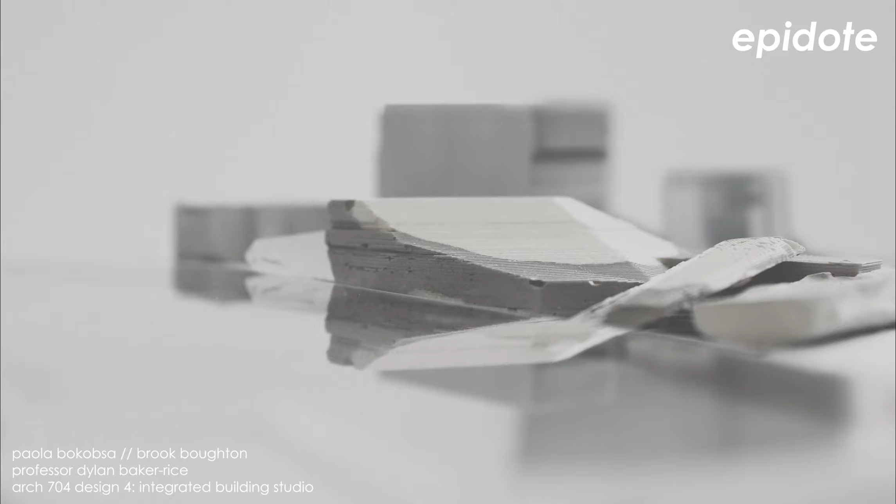Our site sits at the intersection of the shifting and re-energized Brooklyn Navy Yards and the socially complex Williamsburg. We studied the evolution of the Brooklyn Navy Yards dating back to the early 1800s and focused these studies on the ideas of change in time through the lens of the shifting shoreline and piers.

We found our site in a state of disuse and neglect, yet a sense of calm, nature, and serenity was deeply imbued. Wildlife is abundant, the channel invites people to explore the water's edge, and the sounds of the city are distant.

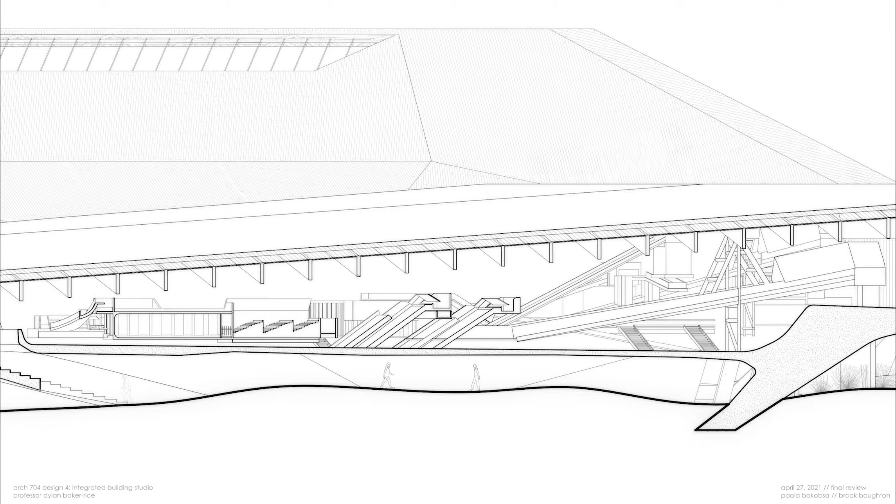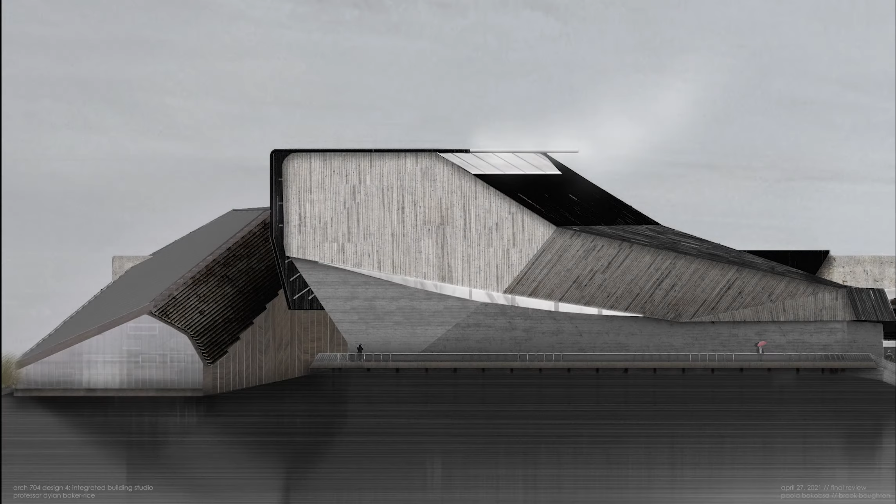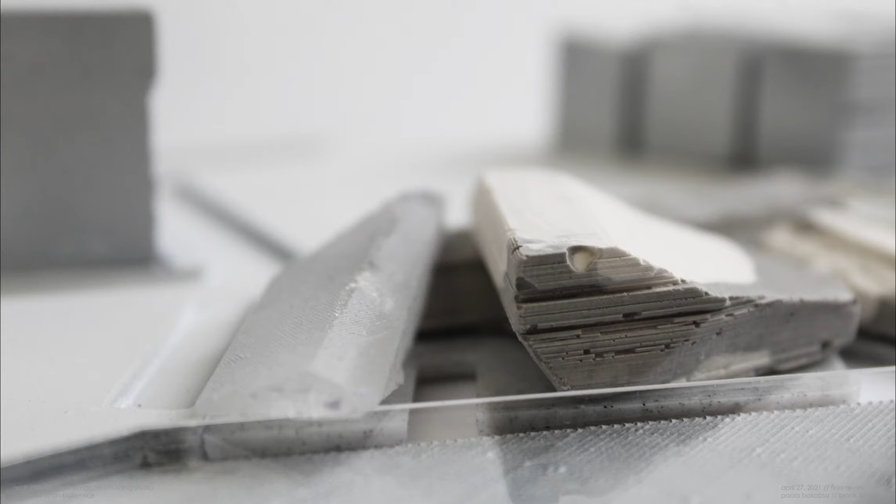The site gave an opportunity to create an industrialized nature by breaking down the dichotomy of human-built and natural habitat. The reinterpretation of sea caves as natural environments to architecturalize spaces created various moments of speculation. We asked ourselves the following question: how can natural spaces be reshaped through architectural means?

Our project aims to create a retreat from the city, while being conscious of the constraints of time and the constant change of the environment. It is a space for reflection and introspection.

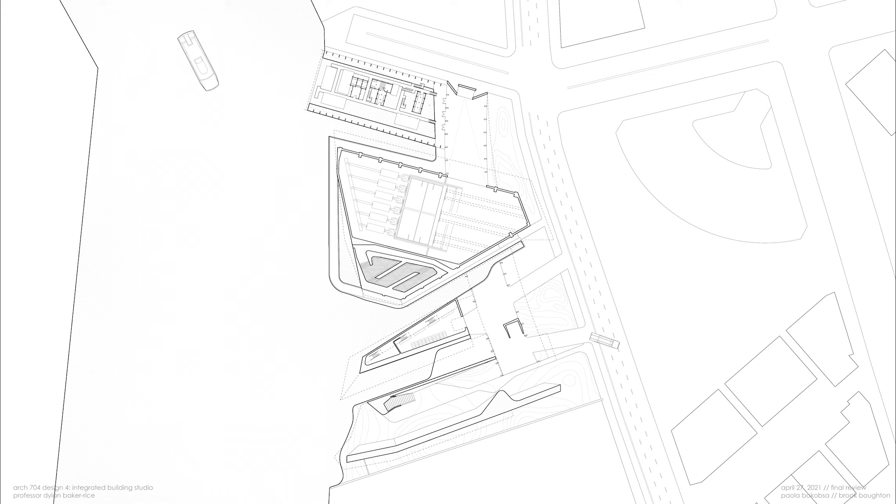We fractured the idea of the program itself, destruction and regeneration, and we applied it to the design of the site, the buildings, and the circulation.

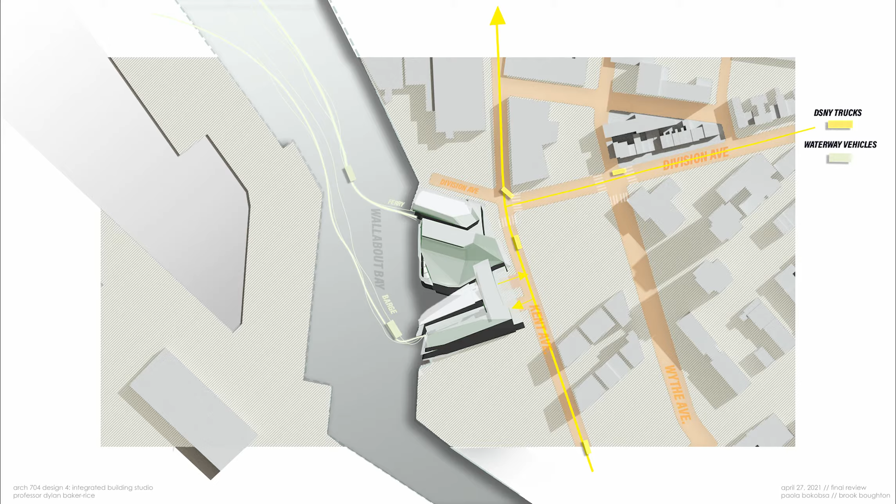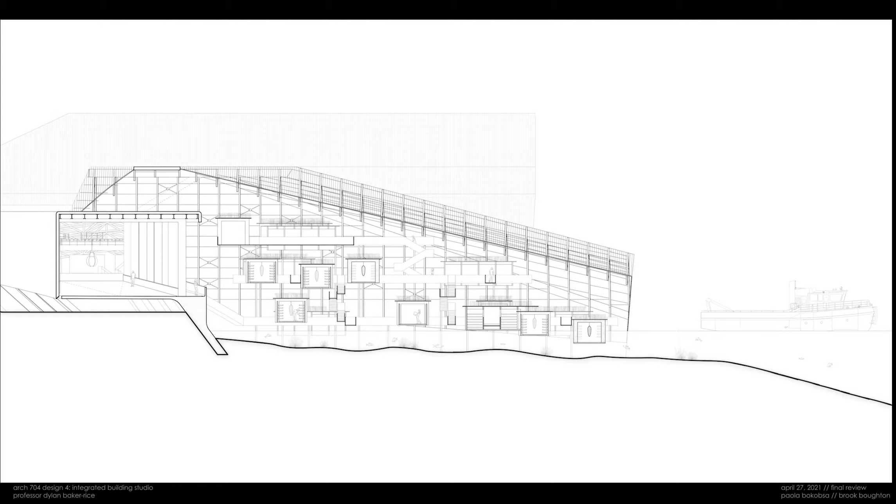When studying the division between building and environment, we discovered nature's equivalent to the waste-to-energy cycle. The mushroom farm located at the north end of the site serves as an allegory for the program at large. This farm acts as a contained ecosystem for Wallabout Bay while also being part of an on-site production of mycelium panels.

Although there are moments of retreat and peace, they are interrupted by the essential presence of ferries and barges. These waterway circulations have a primary role in the building's program and design.

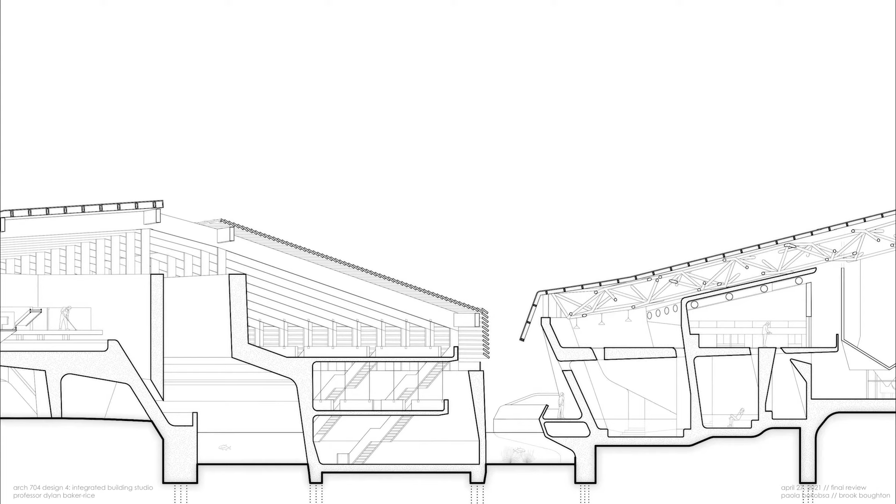They carve the water's edge and fracture the masses like centuries-old formations. We then recontextualize these fragmentations back into an architectural language.

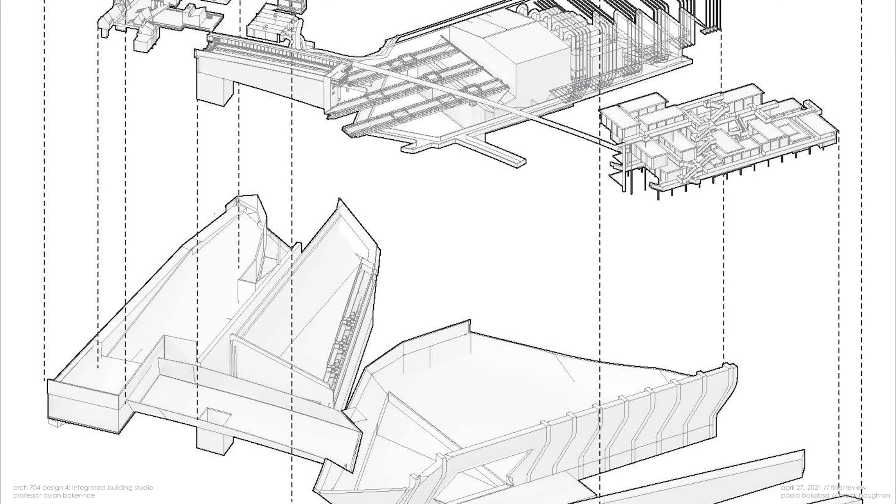The design of the structure started with the conceptualization of the building's structural systems. They transition between one mass to another and symbolize the link between the fragmentation in materiality and their volumes.

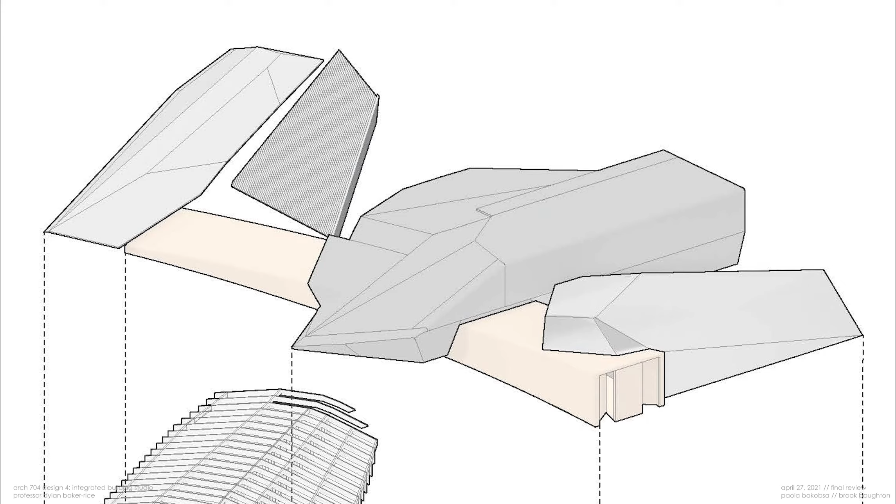Each of these systems are adapted to the structures and specific materials, all connected to a singular massing, shaping a unique circulatory system. Through overlapping of material fragmentations, a passive ventilation system was generated by these conditions in the enveloping walls.

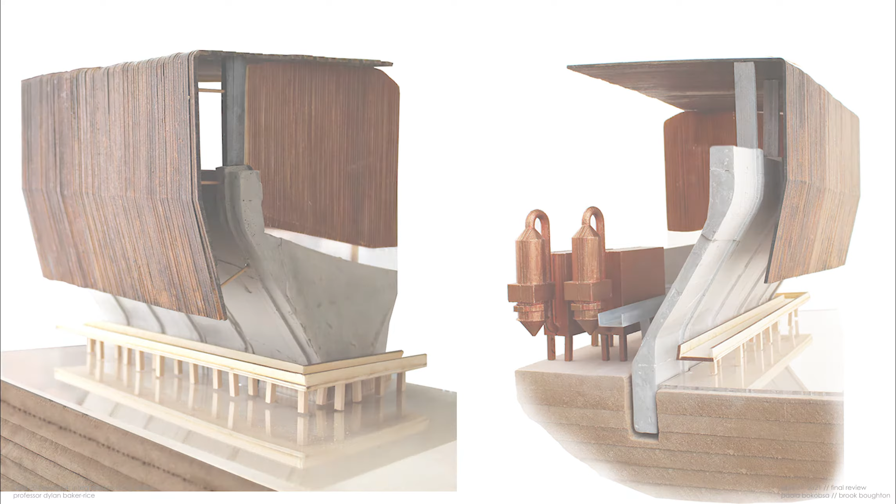Due to the proximity of the lumber mill to the north of our site, it became a significant construction material source. As previously mentioned, the project produces the mycelium panels through the grow house and the separate panel factory.

A connector along the street edge, encased in channel glass, reveals the movement and activity through each programmatic space.

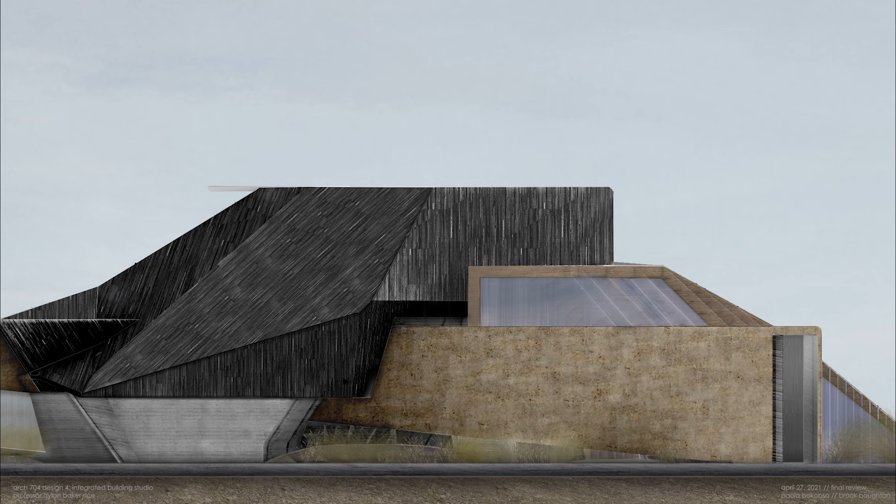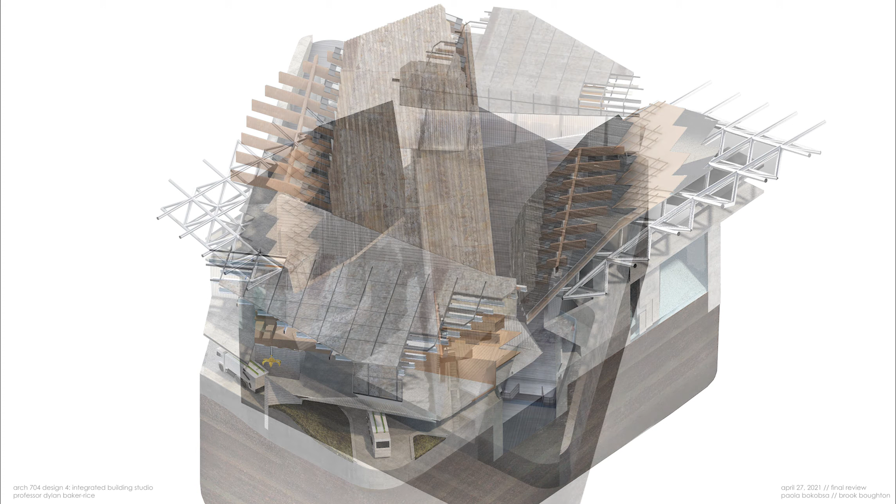By using the program's destructive and regenerative qualities, the project investigates the different conditions of an architectural space within its natural habitat. In other words, the edifice instrumentalizes the intangible lighting and material qualities of the sea cave.

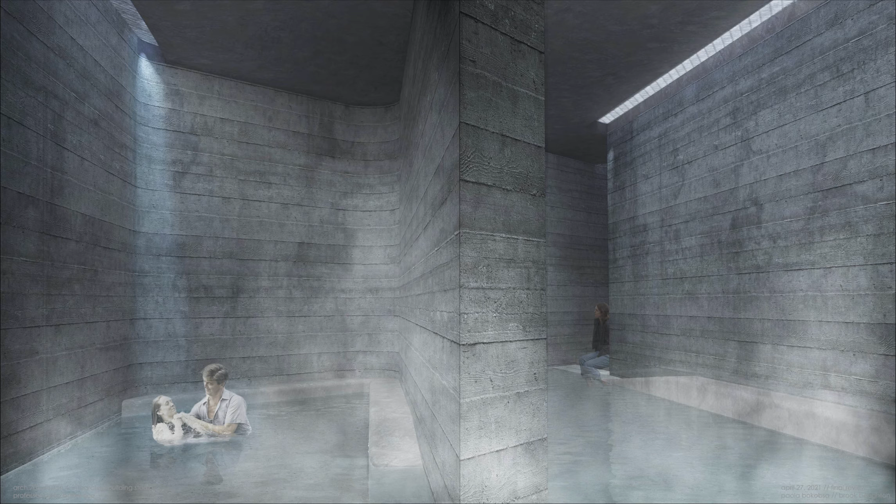Public energy infrastructure cohabits with Wallabout Bay in an intimate way, welcoming people into these new hybrid spaces and architectural formations between the ground and the water.